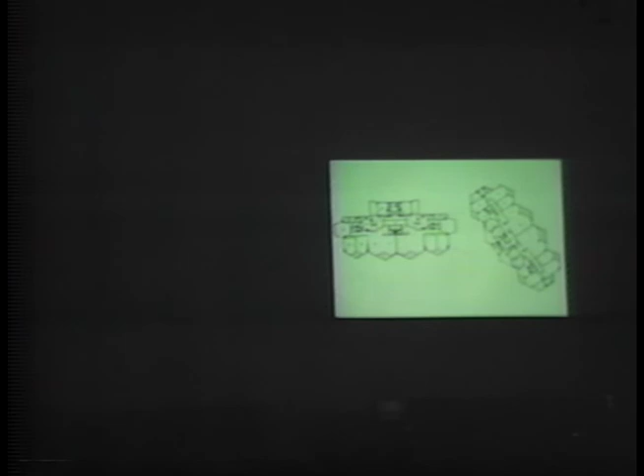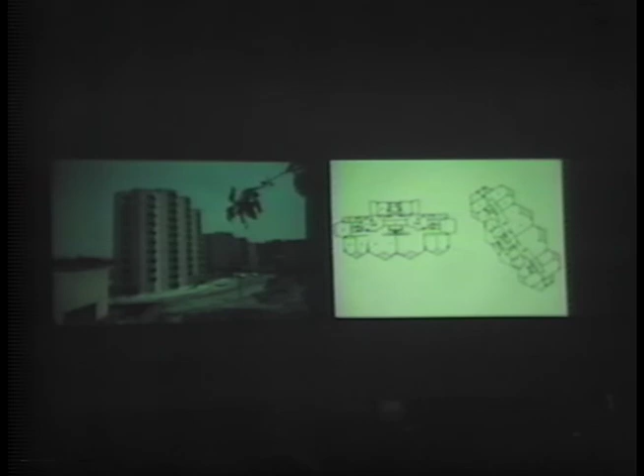This plan is two buildings on a ravine, on a hill. This building is at the top of the hill, and the other is down the hill. I want to make a small intermission to mention that all these photos are by our friend Julius Shulman. I remember we were walking in these hills, and I was very tired after 10 minutes, while he could walk 1-2 hours more. That's very interesting, no? Yes.

Now here. Well, this is the two buildings. This building looks over the ravine, and this other building looks to the street. This building is condominiums, and it's interesting that it's from two different owners. We wanted to make a complex that looks built together, but one was built 2 years after the other. It was a big fight to get the owners to agree on this complex, but we managed it. All the angles are 120 degrees to open the view to different parts of the hill.

The condominiums have 3 bedrooms and a living room, and it's interesting that all have the maid's room on the same floor. There are 2 apartments in each building.

We can see the view from the ravine, from the slope. All is precast in white marble, and this is precast concrete.

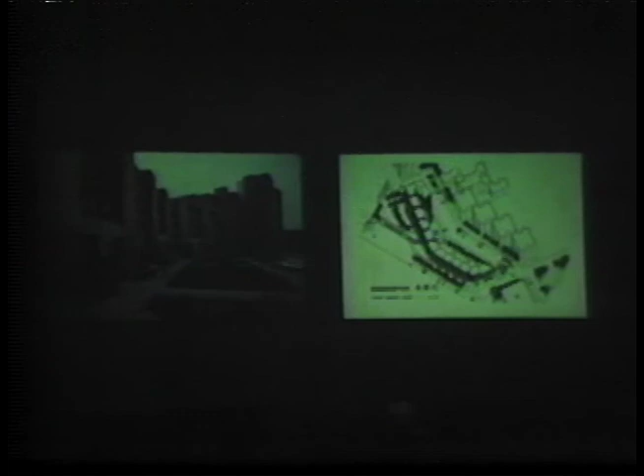At the entrance we have another building of 12 stories high. The next one

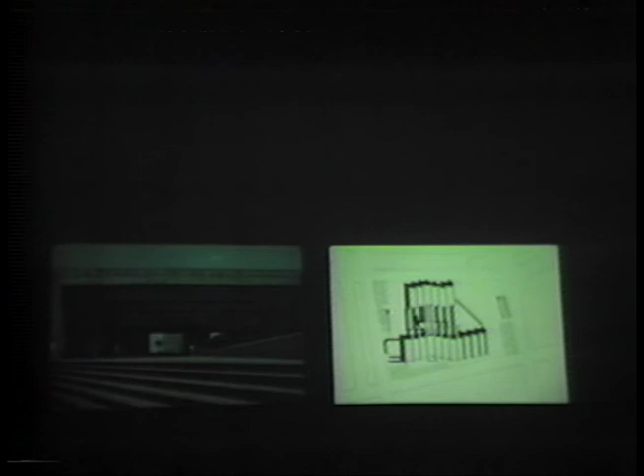You can see the stairs here and the bridge that goes to the mayor's office and to the other offices of the city hall. All is lit with natural light.

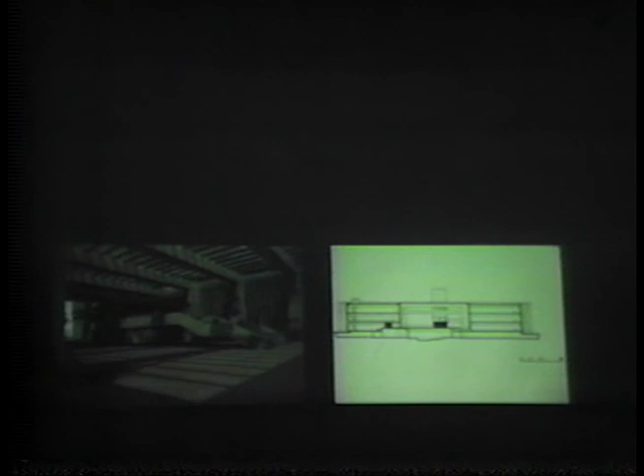You can see here, this is the entrance, and this is the inside court, and under the court is an auditorium. The other areas are offices on the 2 sides of the patio.

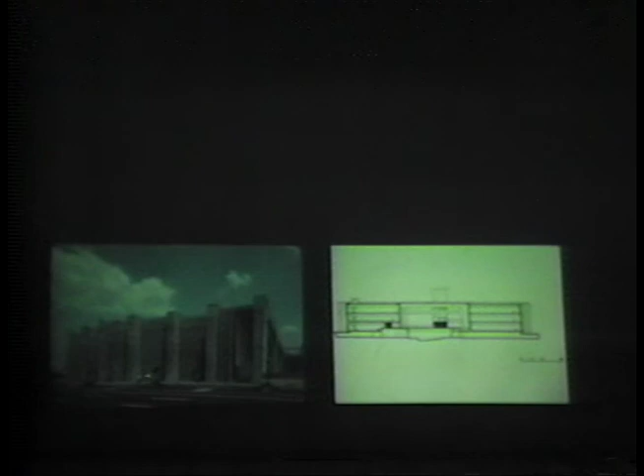You can see here the louvers that face the street and the west to protect from the sun. This is the plaza, and you can see here a terrace where the mayor goes out when civic activities take place.

The structure is concrete, and this is precast.

Okay, I will speak about this because it's my own home. You want to show the cut? This is in a big ravine. You see the section here, and I have a big problem here. The customer was my wife, and she wanted to have a house on one floor, not in a very good place, you understand? It's a very narrow lot with a big ravine.

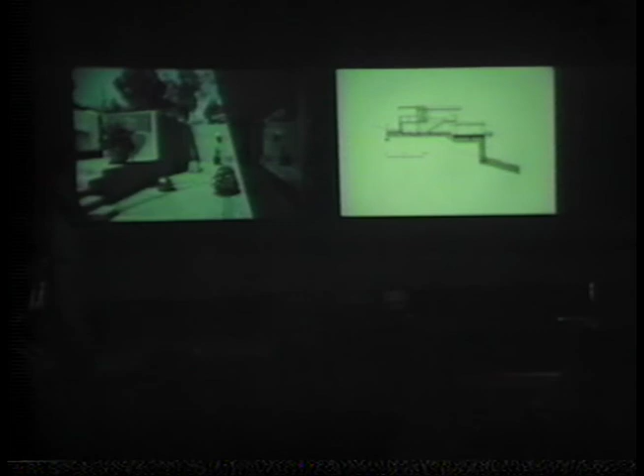All the construction is on this floor. You have a ramp that goes here. This is the big entrance, with services up and all the rooms. You can see the entrance, the ramp. This is a ramp. There is the house, and all the house is a floor below. This is the entrance, and here is all the house with all the rooms. You can see a view from the house, from the garden. This is the entrance. Here are the bedrooms, here is a studio and the living room.

All is concrete, hammered. We began some experiments here about putting marble instead of the regular stone in the concrete. This is a detail of the inside.

Okay, that's the embassy of Mexico in Brasilia. We had the chance to do it. The terrain is standard for all the embassies in Brasilia. They have about 110 yards by 275 on the long side. We have a difference in level between this point and the other, about 16 meters, which is about 50 feet. There is a lake on this part, a big lake, the Lake of Brasilia. We have three elements to put on the terrain: the chancellery, the residence, and the houses of the personnel.

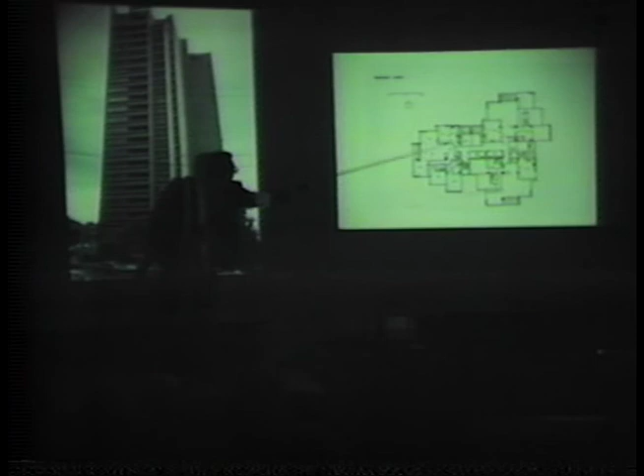These 3 apartments on each floor, one apartment here, another here, another here. You can see the 3 apartments: this is 1, 2, and 3. Each apartment opens to a different view. This is north here, and this side is predominantly closed. You can see all this facade is more closed because it faces north. All the services are on this side. We have 2 penthouses at the top.

All the structure is precasted, the walls too, a special precasting—this is dark stone and this is lighter stone. The sculpture is only on the front.

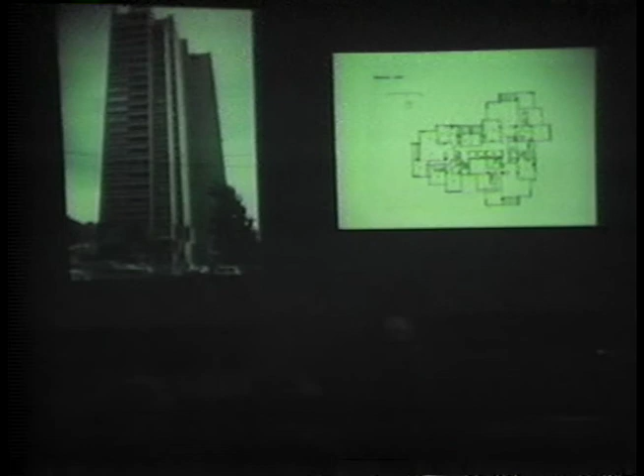We have here a very small square where we put this sculpture from our friend Mathias Goeritz, to prevent people from putting advertisements here. But we failed in this, and you can see it's full of them. Still, it's a landmark, this sculpture, and I think in Mexico it's not often that private people make artistic arrangements like this.

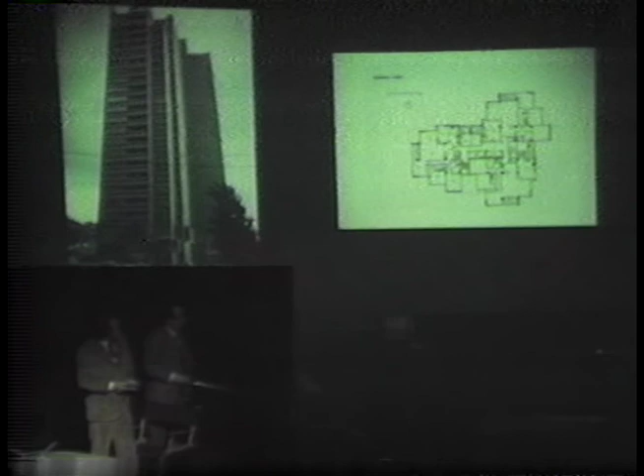¿Sigues con Infonavit? Yes, okay.

This is a building built for the Institute of Fund for Workers' Housing. It's one of the main buildings in Mexico City. It's in a place that has some construction here.

This is the reason we put this building here, that is the parking building, and we open this square that is close here to a second street and gives you all the views over this plaza, and closes the view here, and this opens the entrance to a square that is inside.

It's 4 floors because we didn't want to change the view of this section. It's a residential section, and also because we wanted most of the circulation of the movement of people to be with the stairs and not with elevators.

This is the entrance. All the offices are around this square, which is a prolongation of the outside square. This square is in 2 floors, in 2 sections. One is 1 floor down than this one. All the offices are here and here, and you can see that all the installations, the offices, are around this yard.

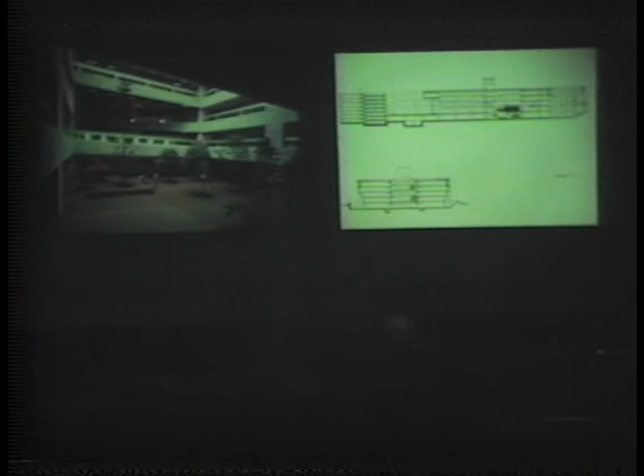This is the main patio. The outside, this is the entrance, and this is inside. All this is precasted.

All this construction is about 300,000 square feet. It was built in 9 months. It's not very usual, but when we receive an order in Mexico that the president is going to open it on this day, we must finish.

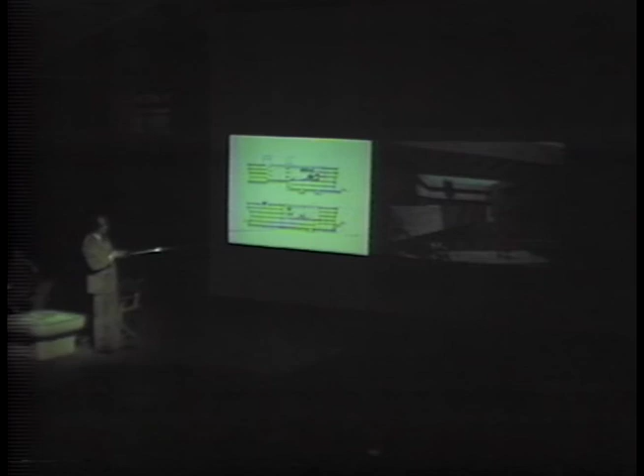The upper level of the patio has the research section and the offices, the direction. Some details. There's the upper patio.

This is the social part, the lower level, the middle level, and here is the upper level in this part, with all the cubicles of the researchers.

Another view of the upper level of the patio. This is a little patio in this part.

That's the west facade. Another view of this west facade. And a detail.

We have something else, the Museum of Tamayo. In the other projector.